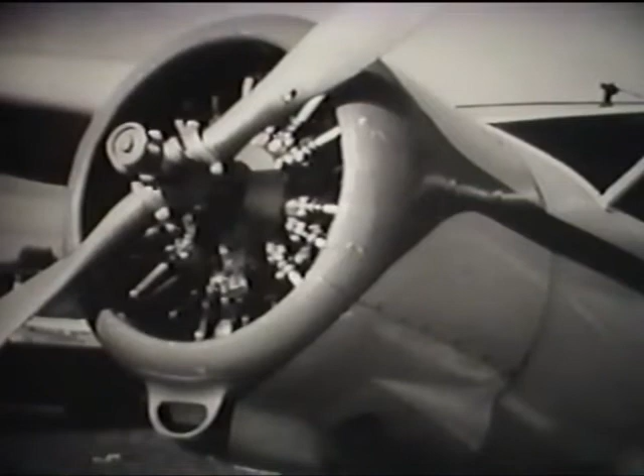In time, the answer came with the invention of the internal combustion engine. So man had finally found the power to conquer his new world of flight. At last, he could fly. But little did these first pilots dream that air would someday become more than a pathway, that it actually would become yet another source of power, the very power that would make modern aviation itself possible.

Power. Power to operate modern instrumentation and other devices. Power produced by air that we today know as aviation pneumatic systems.

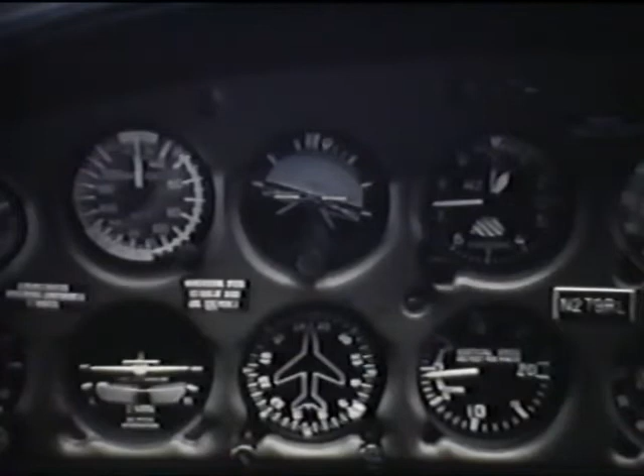The first time it's seen, pneumatics appears to be a strange sort of word, but basically all it refers to is a flow of air to produce vacuum, which is the pull or suction of air, or air pressure, that is the push of air. Simple really, but it is this air vacuum and pressure, pneumatics, which provide a constant and reliable source of energy to operate a number of instruments and other devices in aircraft.

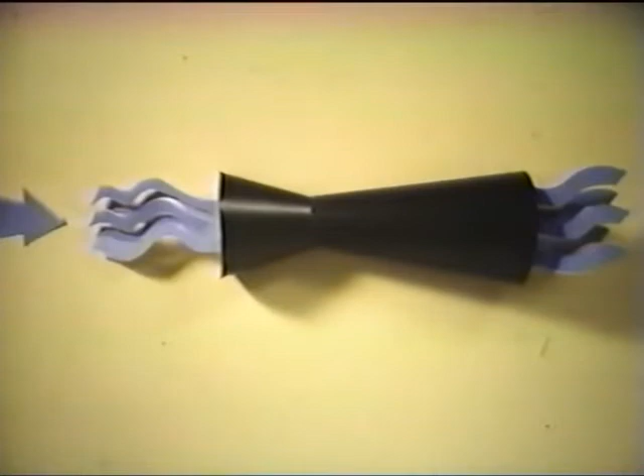These mechanical devices for accurately monitoring flight direction and relative position of aircraft to ground became essential, as did a source of energy to operate these instruments. Early aviation designers took their answer to this problem from the very air in which the pilots flew. Air, a constant source of energy, infinitely available and readily obtained. All you had to do was scoop it in, hence creating the airflow to operate the needed instruments. Early systems amounted to little more than this.

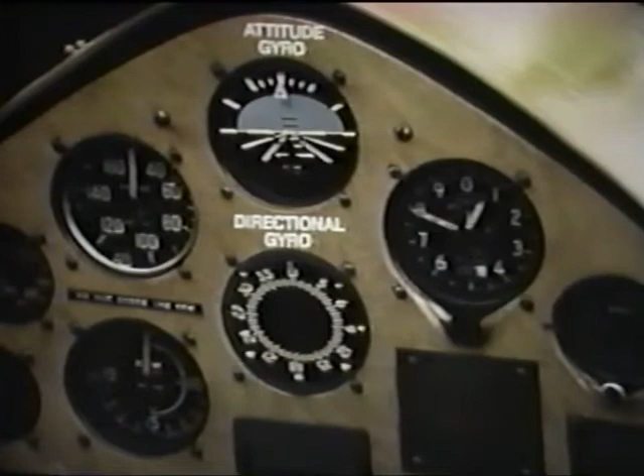They began with a venturi, a funnel-like device which was mounted on the fuselage directly in the propeller slipstream. The air passed directly through this venturi, thus creating a suction of air in the tubing connected to the instrument panel. This suction of air, or vacuum, operated gyro instruments which measured aircraft attitude and direction. The attitude gyro instrument showed the plane's position relative to the ground. The directional gyro instrument showed the pilot his direction of flight.

The basic principle was quite simple. The moving air spun a gyro inside the instrument. The spinning gyro, in turn, produced an instrument reference. Here we see this suction illustrated. As air passes continuously through the venturi, it creates a suction of air in the tubing from the gyro instruments. Air entering the gyros, because of this suction, is first filtered to protect the instruments. The gauge simply measures and indicates to the pilot the amount of suction in this system.

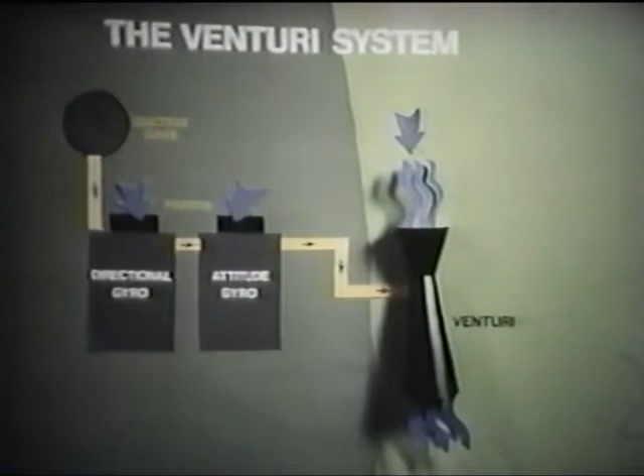The basic principle remains unchanged to this day. In fact, up through World War II, the simple airflow system, obviously refined, was the basic technique for pneumatics. However, a major problem with the early venturi system was the fact that ice could form at altitude, clogging the venturi. This restriction in airflow caused instruments to inadequately function. So a new and better system had to be invented to permit flying in adverse conditions.

Some mechanical means was required to produce the necessary airflow. Thus was the wet air pump and system introduced to aviation pneumatics. Mounted on the aircraft engine and powered by it, the air pump provided dependable airflow in any weather. Further advances logically centered on air pumps, which became the principal component of any pneumatic system. The first air pumps used engine oil for cooling and lubricating. Therefore, this was referred to as a wet system.

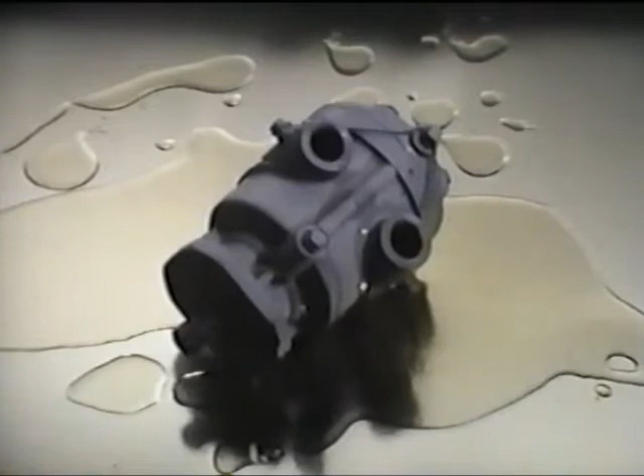Like the venturi system, the wet air pump system operated on the basis of air vacuum. However, unlike the exposed venturi, the airflow, now created by a pump, was totally contained within the aircraft. Cabin air was pulled through the instruments with a regulating valve controlling the proper amount of vacuum.

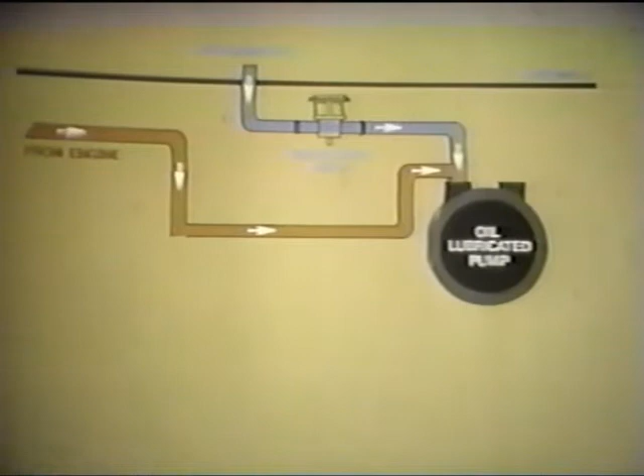Cooling and lubrication for the pump were provided by engine oil, which was drawn through the pump at the same time as the air. A mixture of oil and air was forced out of the pump, where it was diverted to an oil separator. Most of the oil went back to the engine, and the somewhat oily air went overboard. A bit cumbersome and somewhat messy, to be sure. But the wet pump still was a big step in the right direction for aviation, and many wet air systems are still in use today.

Not only did the arrival of air pumps eliminate the problem of venturi icing, it also provided enough extra airflow to conquer yet another icing problem. When flying during inclement weather, such as rain, sleet, or snow, ice would build up on the leading edges of the wings and tail, creating dangerously excessive weight.

It also disturbed the aerodynamic flow, thus reducing control, or at the worst, even causing loss of control. To solve this problem, inflatable rubber boots were developed which could be attached to those surfaces vulnerable to icing. These boots drew the air for their operation from the ample flow created by the air pump.

While inactive, the boots are deflated. When ice forms, the boots are inflated, thus cracking off the ice. Once the ice is removed, the boots are again deflated. Special valves operated by the pilot control this function. Designers soon saw more tasks to be performed by pneumatic systems. And all this was made possible by the wet air pump.

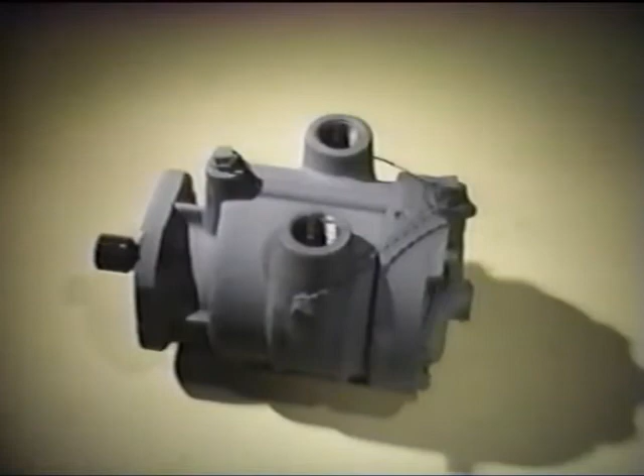However, along with these benefits, the wet system also presented numerous disadvantages. For example, the need for oil separators made the system complex and heavy. Oil used to lubricate the pump could in time work its way through the entire system and eventually contaminate the rubber boots and control valves. Additionally, the oily air dumped overboard streaked the fuselage or wings. Obviously, something still better was needed.

The answer was the dry system, pioneered by Airborne and introduced in 1957. Like the wet air pump, the dry air pump also is mounted on the aircraft engine and is powered by it. From here, the differences are significant, for introduction of the dry air pump amounted to a unique breakthrough in aviation pneumatics design.

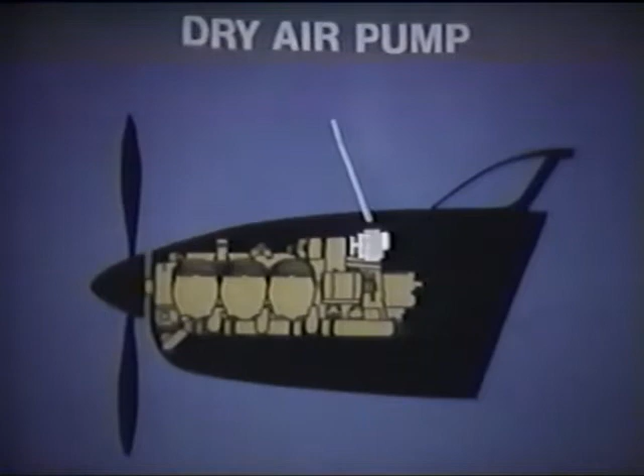This successful development of a self-lubricating dry air pump now eliminated the need for oil cooling and oil lubricating. The dry system thus offered all the advantages of the Venturi and wet systems, but overcame the major disadvantages of both. The simple, lightweight, and dependable dry air pump is the heart of today's dry pneumatic systems. Clean, dry air does all the work in this system, eliminating the need for heavy oil separators and excessive oil lines. There is no oil contamination of the de-ice system, and the dry air system is easy to maintain.

Yes, the dry air pneumatic system was a milestone advance for aviation. It opened the way for many more tasks to be performed by pneumatic power, tasks to meet important needs in aviation. Almost every year was bringing with it new demands for aircraft to fly higher, farther, faster. At the same time, pilots and their passengers were calling for greater safety, more comfort and convenience.

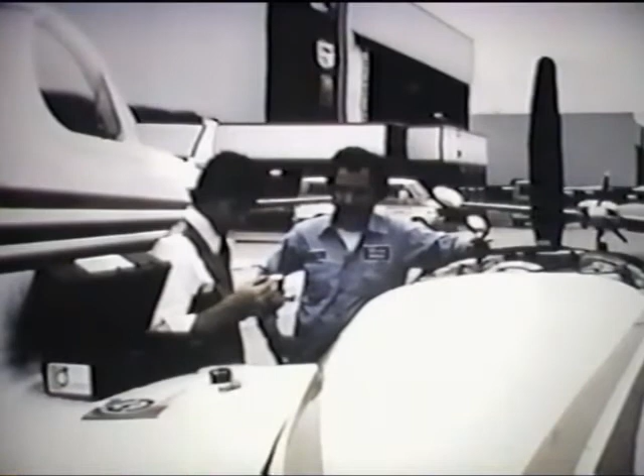And this led to increasing demands for performance from pneumatic systems, as well as adding to a growing list of tasks to be performed. For example, in addition to powering instruments and de-ice systems, pneumatic systems today must seal doors for pressurized aircraft. And they must energize autopilots. In addition, manufacturers, owners, and operators of aircraft were demanding longer life, greater reliability, and economy from their pneumatic systems.

These performance demands called for basic and significant improvements in aircraft pneumatic systems. The dry air pump provided the basis for greater efficiency. Further improvements were made throughout the dry air system itself, to the point where this system is now nearly universal in the general aviation industry. You'll now find dry air systems in aircraft of many different types and sizes, largely because the dry air pump can deliver reliable pneumatic power through both of the two basic ways, vacuum and pressure.

For a vacuum system, air lines are connected to the dry air pump's inlet port, which pulls air. For a pressure system, lines are connected to the outlet port, which pushes air. In a vacuum system, the air pump draws or pulls air from the aircraft cabin, drawing the air through the pneumatic system and those instruments attached to the system. In the pressure system, the air pump draws outside air through an inlet filter and then forces or pushes the air through the system and the attached instruments.

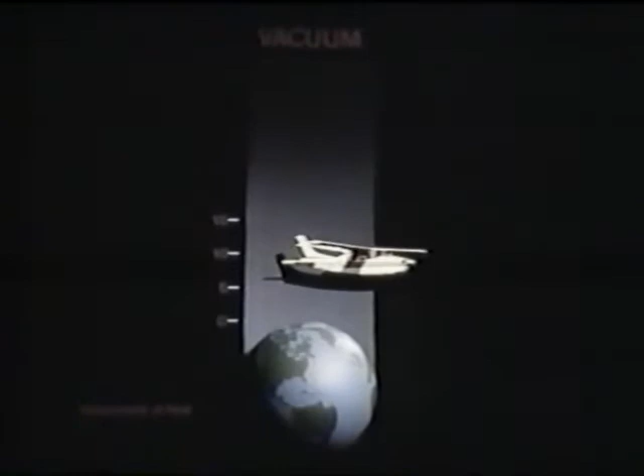While vacuum systems perform well in the applications for which they are intended, they may be less efficient for high-altitude, high-performance aircraft. Here's why. A pump in a vacuum system operates with higher air compression ratios. This produces more heat in the pump. The thin, dry air found at higher altitudes lacks natural cooling capacity to offset this heat. At lower altitudes, the heavier, more moist air found there has the natural cooling properties to counteract heat buildup. A pressure system operates with lower air compression ratios, thus creating less heat. This results in lower internal temperatures.

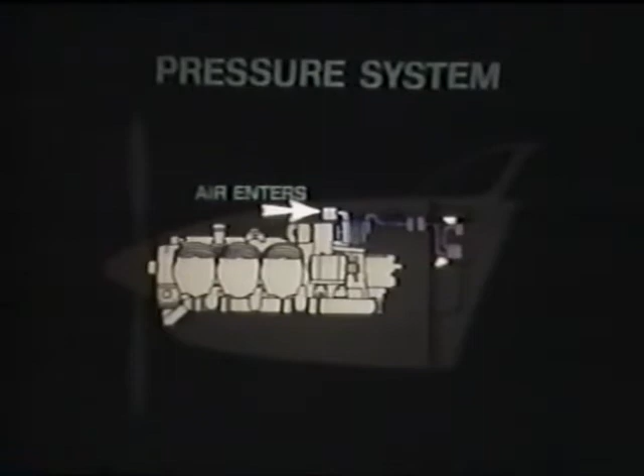Further, in a pressure system, air pressure is higher at the pump inlet, located at the beginning of the system. Therefore, cooler, denser air is moved through the pump. This greater density results in both a greater mass of air through the pump and a higher moisture content at the pump. Taken together, this denser, cooler, more moist air, by both cooling and lubricating internal parts of the pump, helps reduce pump wear and extend pump life.

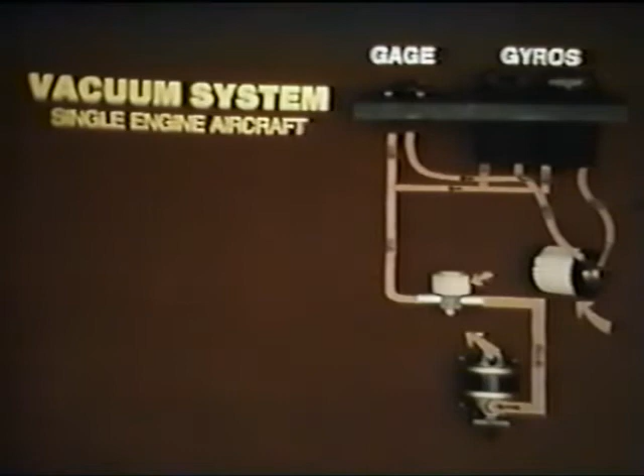Let's take a closer look at both the vacuum and pressure systems. First, the vacuum system. Here is a typical vacuum system in a single-engine aircraft. The engine-mounted air pump draws a constant flow of cabin air through the entire system. Air enters this system through a central air filter. This air is then drawn through the gyro instruments and gauge.

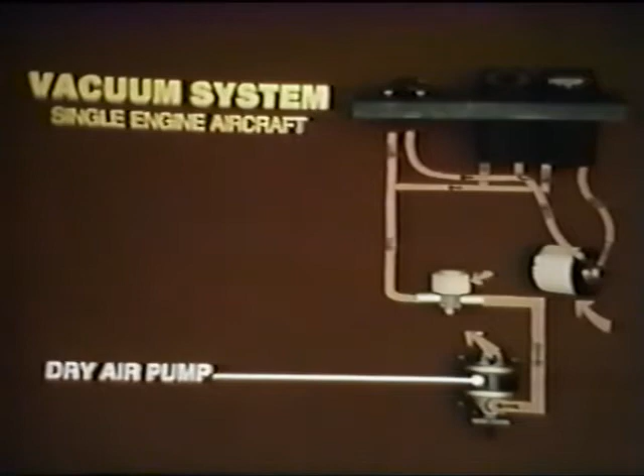Next, a preset vacuum regulating valve located between the instruments and the air pump assures that only the right amount of air is pulled through the instruments, thus protecting the delicate gyros and providing reliable instrument readings. The air pump is at the final point in the vacuum system because, as you'll recall, it is pulling air through the system. Once air is drawn through the air pump, it is dumped overboard.

In twin-engine aircraft, the vacuum system is basically the same. However, there are two pumps connected by a manifold with check valves drawing air through the entire system. This provides a backup energy source should one engine or pump fail.

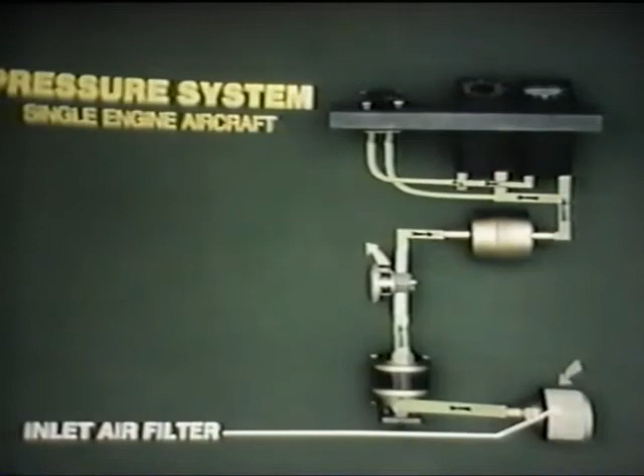Now let's take a closer look at the pressure system. Here is a typical pressure system in a single-engine aircraft. The air pump, also engine-mounted, pushes a continuous flow of air through the entire system. In such a system, necessary air is drawn in by the air pump through an inlet filter. The air pump is located at the front end of the pressure system because it is pushing air through the system. This pressurized air first passes through a pressure regulating valve, which maintains a preset pressure to properly operate and protect the instruments by releasing any excess air pressure.

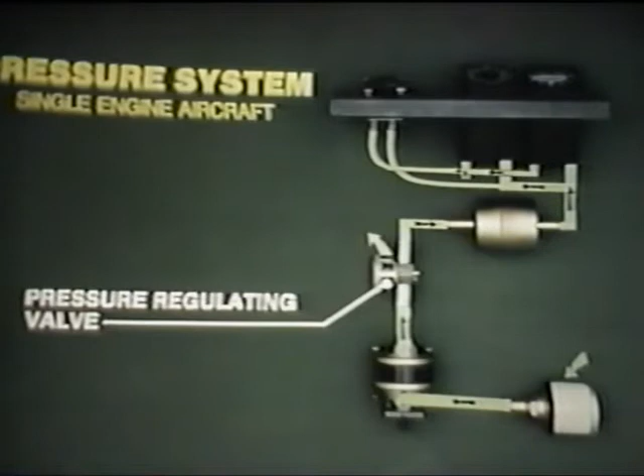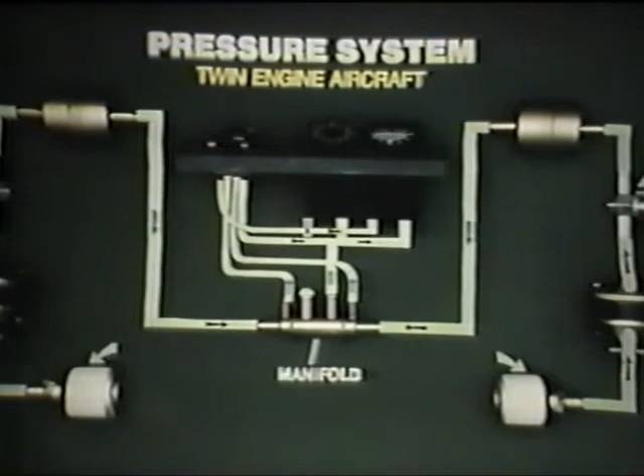The air at proper pressure then travels through an inline filter which protects the delicate gyros from any contaminants remaining in the system. Finally, the pressurized air is pushed through the gyro instruments and gauge, providing reliable instrumentation for the pilot. The pressure system is basically the same in twin-engine aircraft. Here, two pumps force the air through a manifold with check valves to direct pressure distribution to the airplane's instruments, and again ensure backup energy in case of engine or pump failure.

As we've seen in the preceding schematics, both the vacuum and pressure systems are made up of four basic components: dry air pump, regulating valves and gauges, fittings and tubing, and pneumatic filters. Let's examine each component separately. First, let's consider the dry air pump. This remarkable pump truly is the heart of an aircraft's pneumatic system. Like the human heart, the dry air pump is delicate, precise, and yet extremely durable. And also, like the human heart, its internal parts are structured to work in perfect unison with each other and with the circulatory system of which it is the main part.

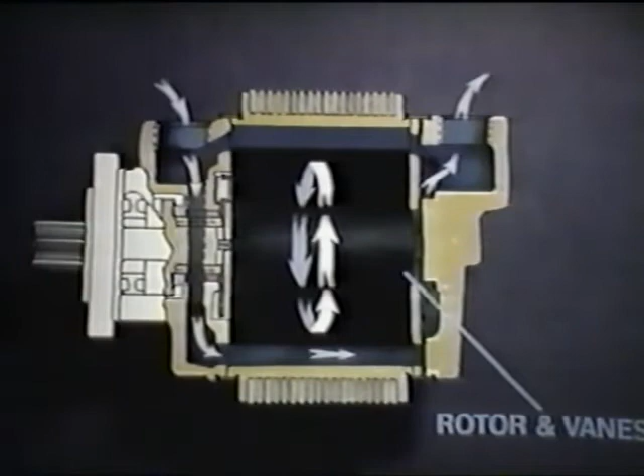This engine-mounted pump generates all the airflow, moving air with a rotor and vanes that roughly resemble a paddle wheel. It either pushes air to create air pressure or pulls air to create a vacuum through the entire pneumatic system. Maximum performance and pump life are achieved through a precision-engineered design, special lightweight materials, and careful construction. For example, the rotor and vanes on Airborne dry air pumps are made of a special carbon which is self-lubricating. As the vanes rotate with the rotor, vane tips wear at a precise rate, providing the pump's lubrication. This is why no oil is required. This is also why it's called the dry air pump.

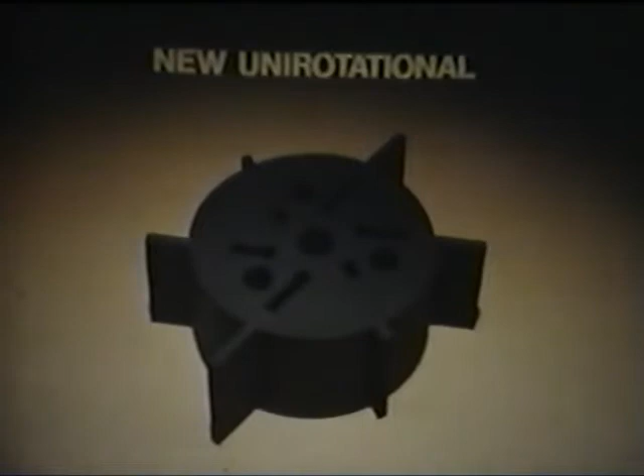Driven by the aircraft engine through a set of gears, the spinning rotor and vanes draw air through the front inlet port, creating vacuum there, and push it out the back outlet port, creating pressure. We compared it earlier to a paddle wheel. Unlike early air pumps, which had short vanes set straight into the rotor, such as shown here, the vanes on an Airborne pump are canted or set into the rotor at an angle. This allows for much longer vanes, with a corresponding increase in both efficiency and vane life.

However, because the vanes are canted, the rotor can turn in only one direction, clockwise or counterclockwise, depending on the engine's drive pad rotation and pump model. This actually is an advantage, and one of the reasons why Airborne engineered this approach. The unirotational design can increase pump life significantly over that of birotational pumps.

Airborne dry air pumps also have a unique patented torsional coupling. Made of flexible urethane, this coupling helps absorb engine vibration, thus increasing pump life. It also protects the engine from damage in the remote possibility of pump seizure by shearing and allowing the drive spline to rotate freely.

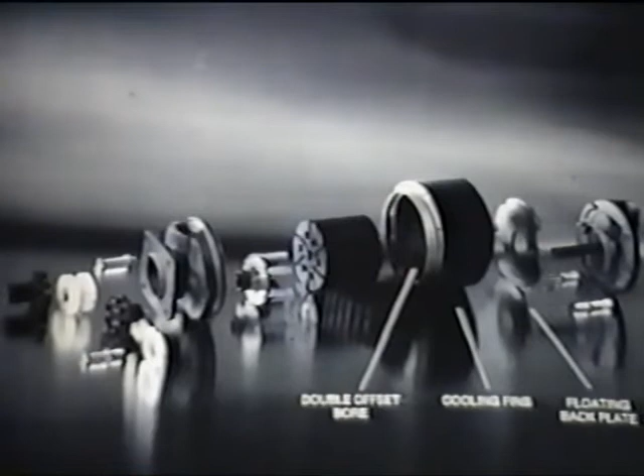In addition, Airborne dry air pumps have these features: a double offset bore that helps balance internal loads and bearing wear, cooling fins on high-pressure pumps to dispel heat, increasing pump life, and a floating backplate which allows for heat expansion, maintaining pump efficiency and life.

A final benefit is the fact that Airborne's dry air pump design features have allowed the development of efficient and long-life pumps for virtually all capacity requirements of today's general aviation aircraft. Next, let's consider another important part of any pneumatic system: the valves and gauges.

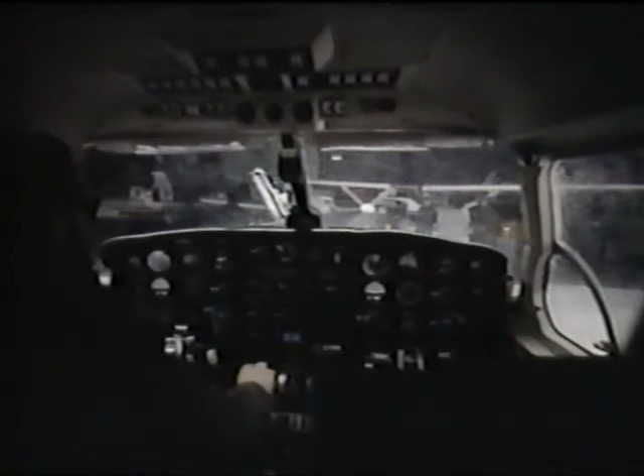In order for an aircraft's instrumentation to function accurately, exact vacuum or air pressure must be maintained within the system at all times. Compensation must be made for power surges, engine speed changes, de-ice boot inflation, and the like. This is a job for the pneumatic regulating valve, a precision component which is carefully preset at the factory to match its specific function in the system. There are regulating valves for both vacuum and pressure systems.

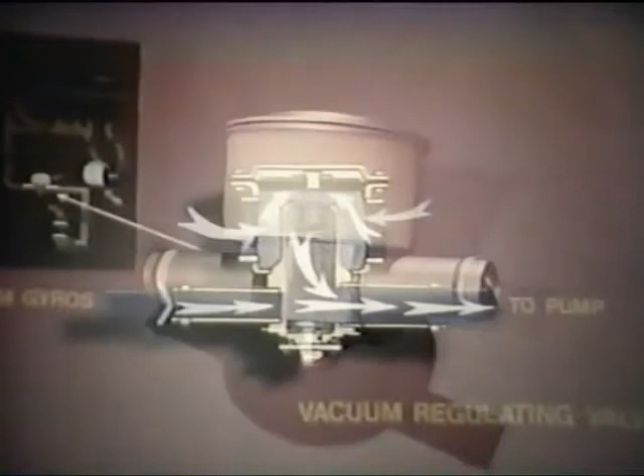A vacuum regulating valve is the main valve in a vacuum system. This valve protects the delicate gyro instruments by preventing any excess suction of air through the instruments. Here's how. Because the air pump draws more air than is required to operate the instruments, this preset valve opens a second stream of air to the pump, thus maintaining the proper vacuum level of air being drawn through the gyro instruments.

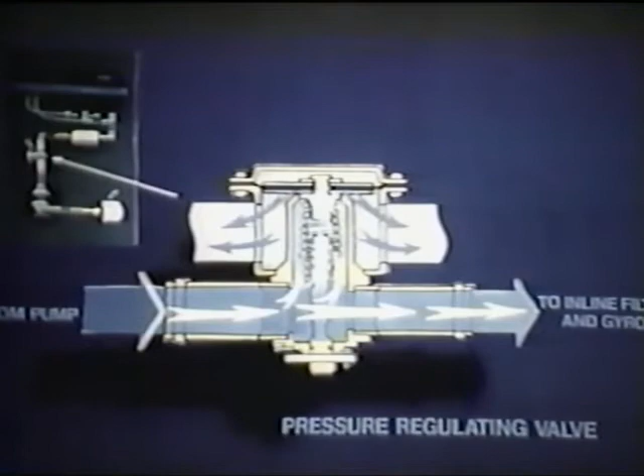In a pressure system, a pressure regulating valve is used. Since the air pump can push more air into the system than is required, the valve provides pressure relief when needed by opening and thus allowing some air to escape. This reduces any excess pressure into the gyro instruments.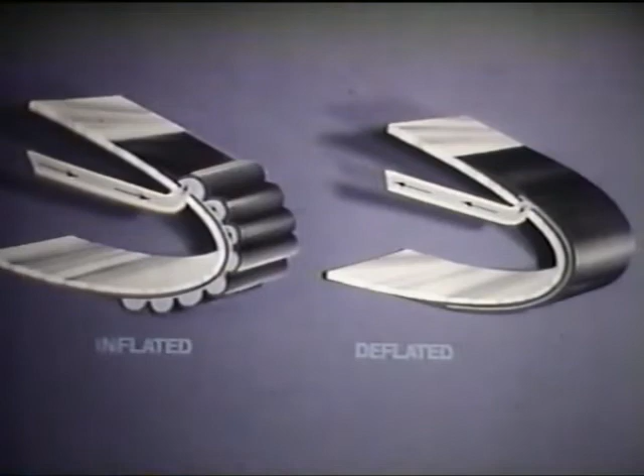Similarly, other valves work in conjunction with various pneumatically powered devices, such as de-ice boots. These valves can be activated by the pilot and used to direct air into the boots, thus inflating the boots and breaking off ice which has formed on the wings or tail, and to remove air from the boots, thus deflating them once ice has been removed.

Meanwhile, as these valves are activated in either mode, the pneumatic system remains in balance, the airflow continuing uninterrupted as it performs its other tasks. You'll find special purpose valves such as these in both vacuum and pressure systems, each valve designed to operate under the airflow designed into the particular system.

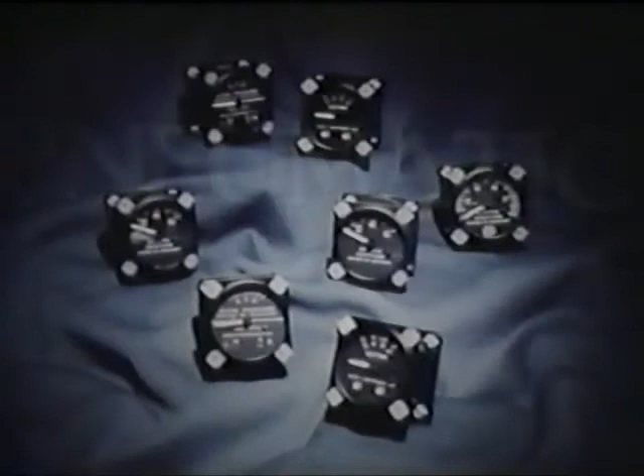The pilot also has a way of checking on his pneumatic system. He does this through pneumatic gauges on the instrument panel. Just like the valves, two types are basic: vacuum gauge and pressure gauge. Both advise the pilot whether his pneumatic system is maintaining necessary vacuum or pressure.

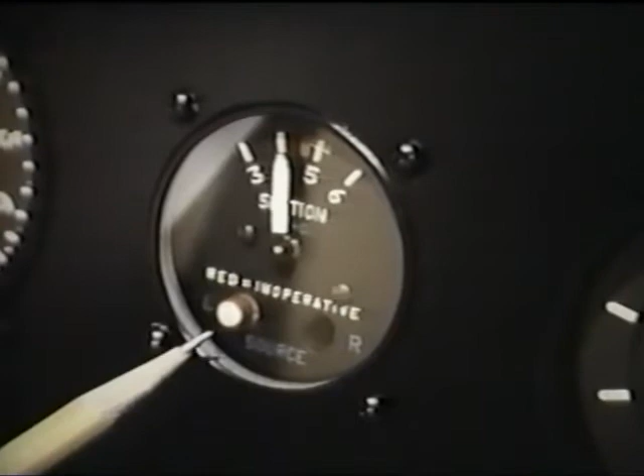If for some reason vacuum is interrupted, the ball will pop out, indicating that one side of the system is inoperative. In other words, this immediately warns the pilot that half of the airflow has been lost. Meanwhile, proper gyro operation is maintained with the one pump that is functioning properly.

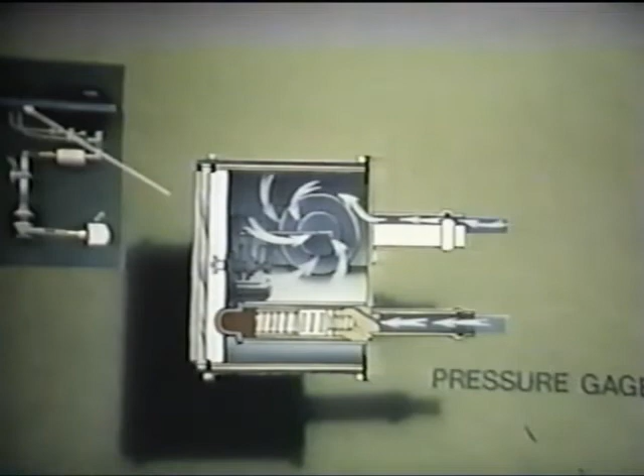In the pressure gauge, air pressure compresses a bellows, which moves the needle to give the pilot a reading on his system's air pressure. In a twin-engine application, in addition to giving a pressure reading by compressing the bellows shown at the top, this same air pressure forces the red ball at the bottom into its recessed position. If air pressure is lost, the red ball pops out to warn the pilot of a malfunction.

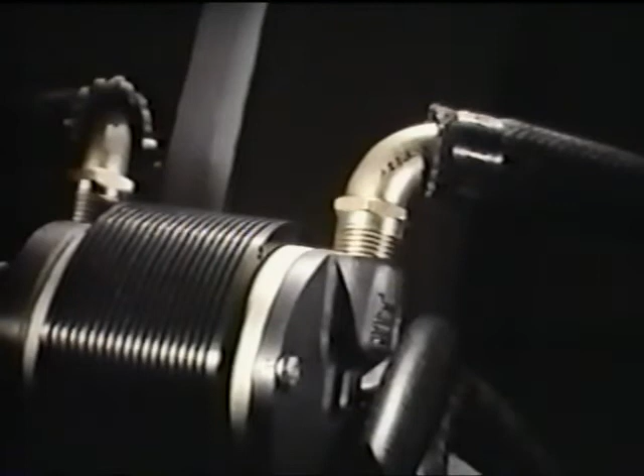Next, let's consider some components which are immediately related to the valves and gauges. These are the fittings and tubing through which the air in a pneumatic system flows. Although they are the simplest components in a pneumatic system, the fittings and tubing are just as vital as the rest. Continuing our comparison to the human heart and circulatory system, the tubes and fittings can be thought of as the veins and arteries. Just as the human circulatory system will fail if there is a blockage, so must the pneumatic system have an unrestricted flow in order to maintain the health of the system.

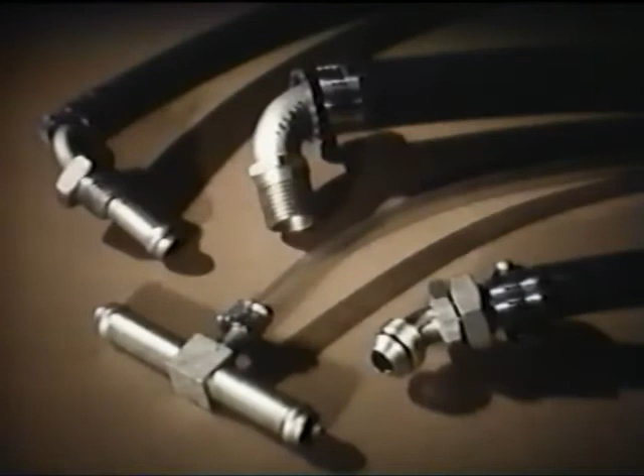Therefore, the pneumatic fittings and tubes, and in particular the fittings, must be carefully tailored to their tasks, providing proper airflow for instruments and other devices. Airborne low-loss fittings, with their wide-open passages, smooth-swept bends, and minimal restrictions, help prevent any loss in the vital flow of air. The freer airflow possible in this modern design becomes even more apparent when it is compared with the older design AN fitting.

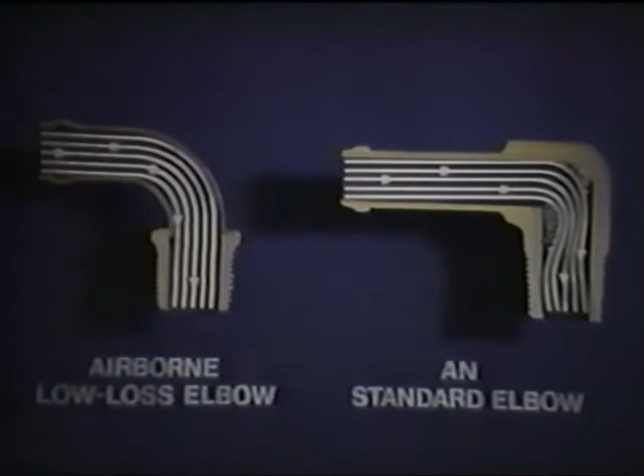AN fittings have sharp 90-degree bends that create areas of turbulence and restriction. On the other hand, Airborne low-loss fittings allow for a much freer flow at any flow rate. However, these advantages mean little if air hoses are not in proper condition or are not of the proper dimensions. Once correct hoses are installed, they should be checked periodically to detect crimps, cracks, frays, or other potential sources of failures.

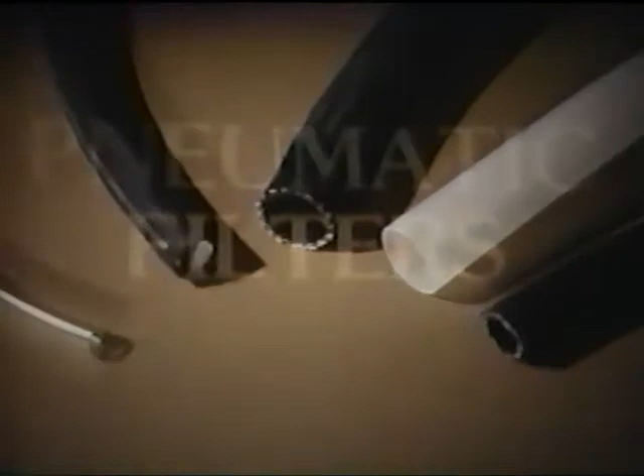Now let's move on to another extremely important part of the system: pneumatic filters. It's easy to overlook the fact that the air in a pneumatic system must be clean air. But clean air is essential, and therefore quality air filters, regularly replaced, are also essential. Clean air is needed not only to assure an adequate and unrestricted airflow. The air in a pneumatic system must also be kept clean in order to protect the delicate instruments and the dry air pump itself.

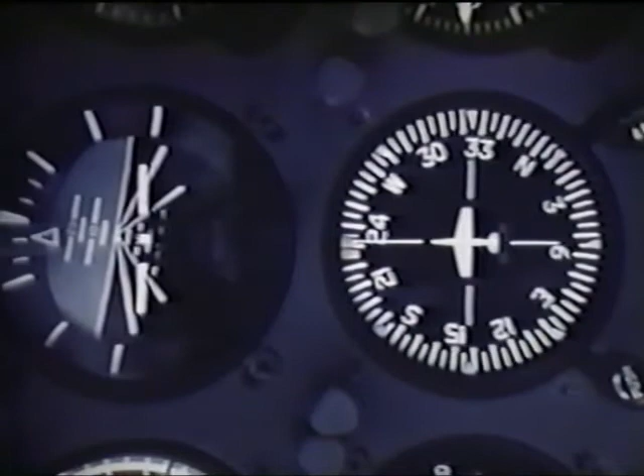To make sure that all of the pneumatic system is kept free of dust, dirt, smoke, and other contamination, several types of filters have been developed by Airborne to provide this essential protection. Let's take a look at several basic types. The inlet vacuum filter is the primary filter for the vacuum system. As the system takes in cabin air, this filter cleanses the air of dust, tobacco smoke, and other contaminants which might endanger the gyro instruments and air pump. Air entering at the regulating valve in a vacuum system must be cleaned by a special foam garter filter, which slips easily over the valves.

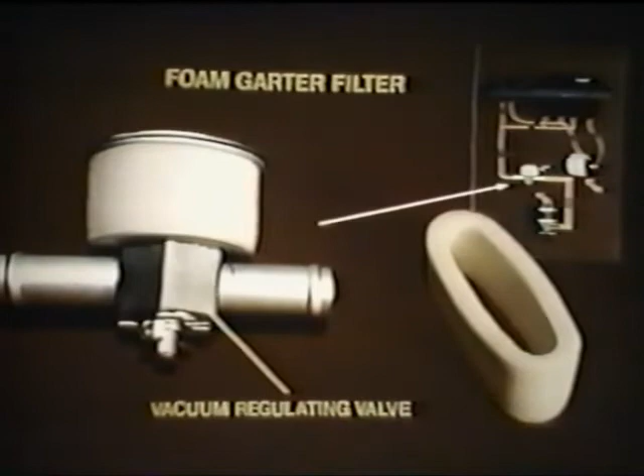Filtration in a pressure system obviously is equally important. Here it also begins with an inlet filter, which cleanses the incoming air prior to its entering the air pump. Inline pressure filters are specially mated to the unique characteristics of dry air pumps. Carbon particles may enter the pressure system from the pump as vanes wear down in the process of providing lubrication. So the air is passed through an inline pressure filter before it reaches the delicate flight instruments.

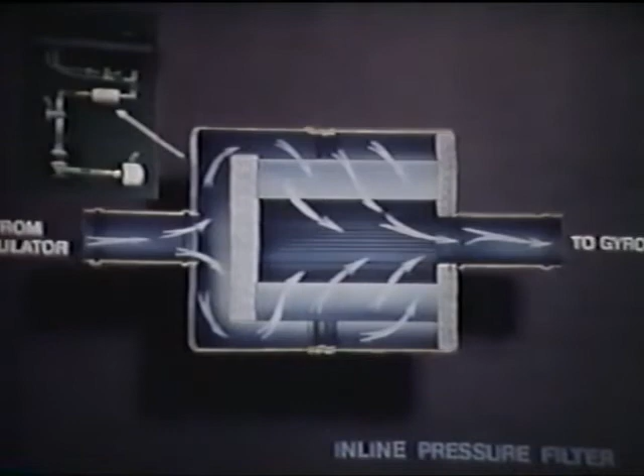This brings us to a final important point. Although they are precision items in themselves, pumps, valves, gauges, fittings, and filters work only as parts of a total system. Pneumatics is more than a collection of parts. It is a complete, integrated system and a vital part of the aircraft itself. A total system. With this important point in mind, pneumatic equipment and components are being designed and applied today with a systems approach. Every part of a pneumatic system should function as balanced portions of a total unit. So every part is designed, manufactured, and mated to function in total harmony.

Remember, however, that no matter how advanced designs may become, the efficiency and reliability of any pneumatic system will always be dependent upon regular maintenance and proper mechanical service. And these vital subjects are covered in Part 2 of this film on modern aviation pneumatics. An idea that flies.

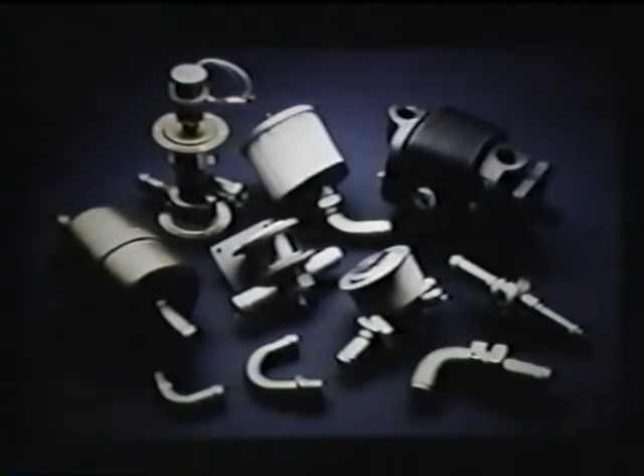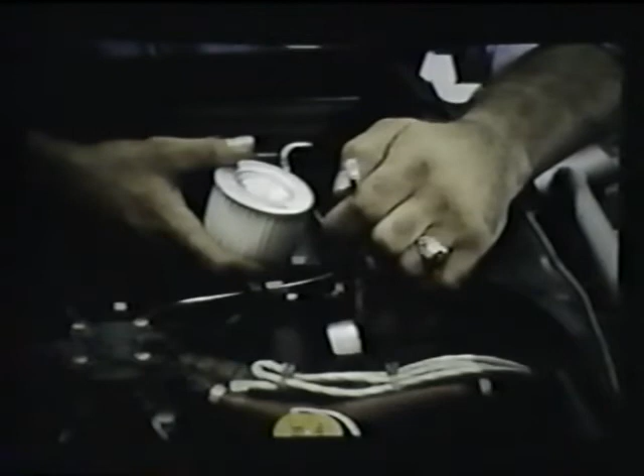Through a constant flow of information and training, our professionals are provided with the necessary experience to deal with pneumatic system field problems. Through the capture of ambient air, we direct its flow for a clean, reliable, and efficient source to operate gyros, inflate door seals, de-ice systems, and operate autopilot systems.

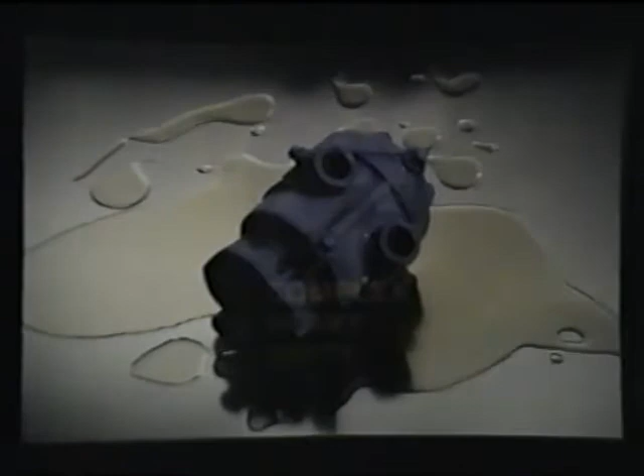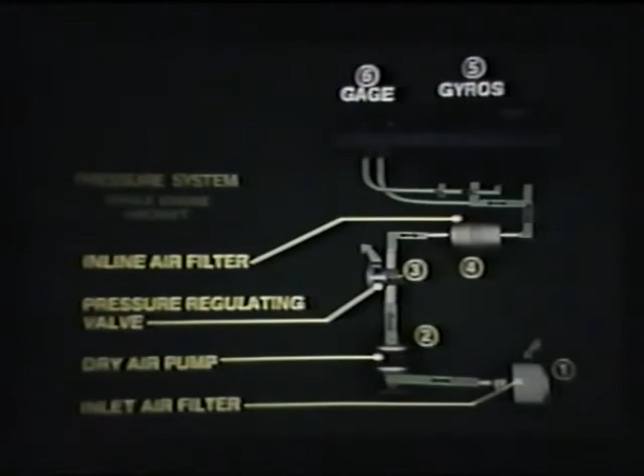Initially, wet pumps were a practical solution, but only for vacuum systems. They were heavy, complex, and consumed excessive amounts of engine oil, not to mention the oil-streaked aircraft belly that resulted. With this, Airborne developed the dry air pump, at work today in virtually every piston-driven aircraft. Our dry air pumps are clean, lightweight, and self-lubricating, eliminating from aircraft the usual oil and dirt contamination inherent in wet pump systems. Our pumps drive the pneumatic system, but every part in the system makes a vital contribution in how long a dry air pump will perform.

A well-maintained pneumatic system provides a clean, reliable source of air. Without proper maintenance, the pump becomes the victim of pneumatic system contamination or damage. It's a case of small problems causing major breakdowns. Fortunately, it's easy to identify probable sources of these problems, and it's all in knowing where to look.

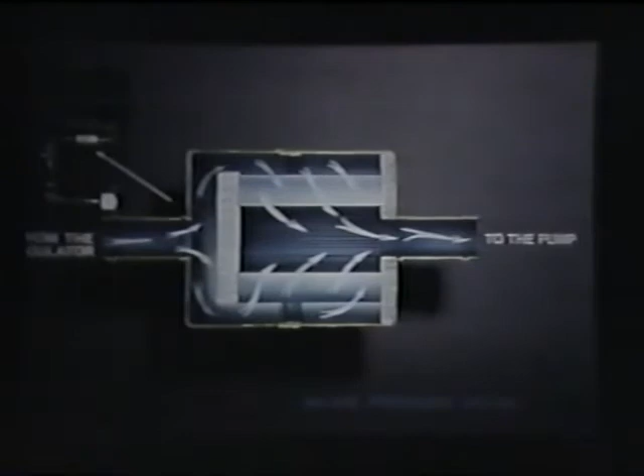Consider filters, for instance, the elements that screen impurities from the systems. The central air filter in a vacuum system and the pressure system inline filter safeguard delicate gyro instruments. The vacuum regulator filter and pressure system inlet filter offer similar protection for the dry air pump and its carbon rotor and vanes, which are built to very close tolerances for maximum efficiency.

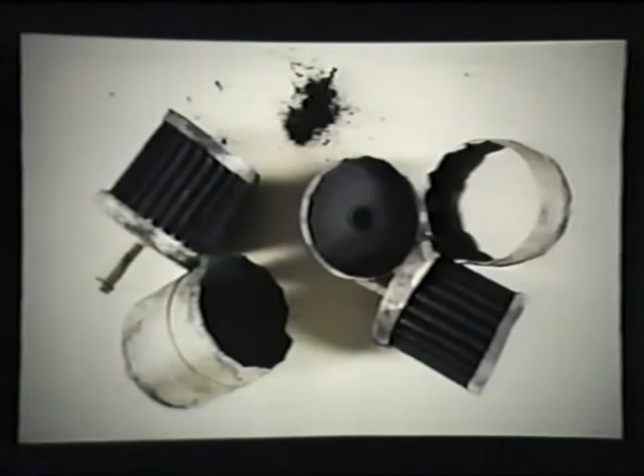Filters are designed to capture impurities. The more they screen, however, the lower the volume of air that passes through them. As the flow of air becomes restricted, the pump works harder and becomes hotter. This causes increased wear, resulting in a shorter service life. The reduction in the flow of air, as seen in the panel-mounted vacuum or pressure gauges, can be an indication of system restrictions, including clogged filters.

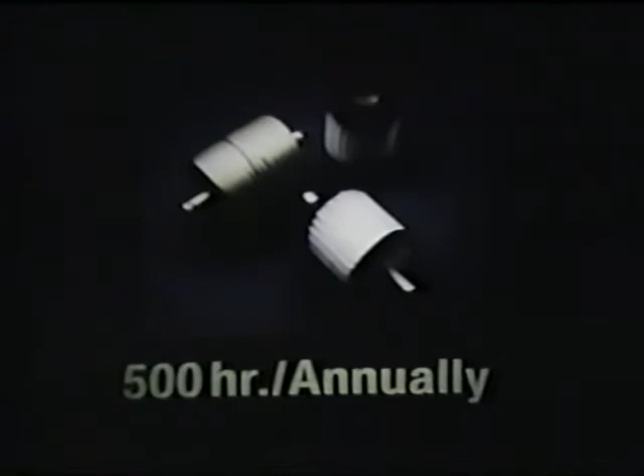Vacuum regulator filters and pressure system inlet filters require replacement every 100 hours or annually, whichever comes first. For central air and inline filters, it's every 500 hours or annually, whichever comes first. During new pump installation, the system should receive all new filters to give the pump a clean, free-flowing system to operate properly.

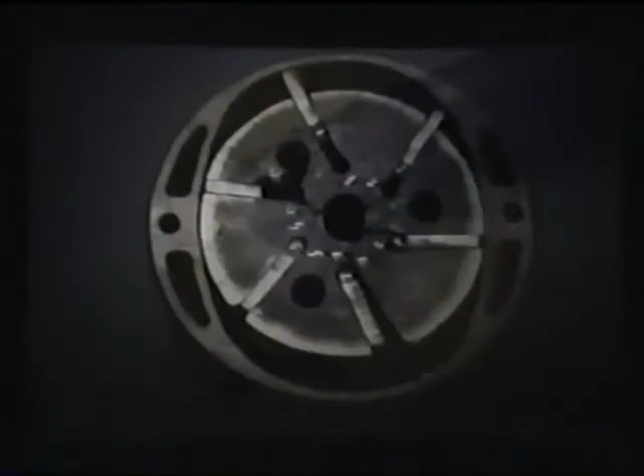However, filters are only one source of potential trouble for dry air pumps. When hoses are allowed to deteriorate, they become hard, cracked, or brittle. A small piece of hose in this condition can cause big consequences. Broken away from the inner lining, it is ingested into the system, where it can clog or rip filters, lodge in control valves, or even make its way to the pump, where it can't be discharged, jamming the vanes or rotor, causing the pump to fail.

Collapsed, kinked, or twisted hoses have the same effect as clogged filters. They restrict airflow and raise pump operating temperatures, virtually guaranteeing increased wear and shortening the pump life. Trouble may also occur when loose fittings create leaks in the system. At any point where airflow leaves the system, pressure or vacuum is lost. In a pressure system, for instance, an air leak will reduce airflow through the gyro. In the cabin, the differential gyro gauge indicates loss of pressure.

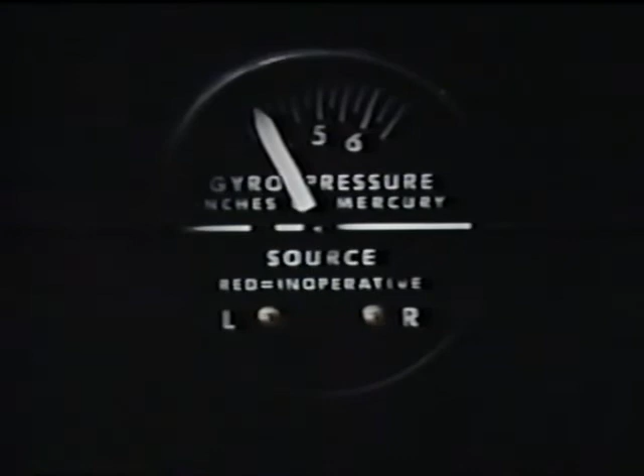An immediate remedy is to increase the setting on the regulator so that even with air loss, the pump forces more air through the filter to the gyros. The trouble is, the pump does all the compensating by creating more pressure than the system should need. It overheats, loses efficiency, and fails to reach its potential service life. It's easy to assume early pump failure means a bad pump in a well-maintained system. It's more likely that early pump failure is a symptom of a poorly maintained system. A high-quality hand-built pump performs only as well as the system is maintained.

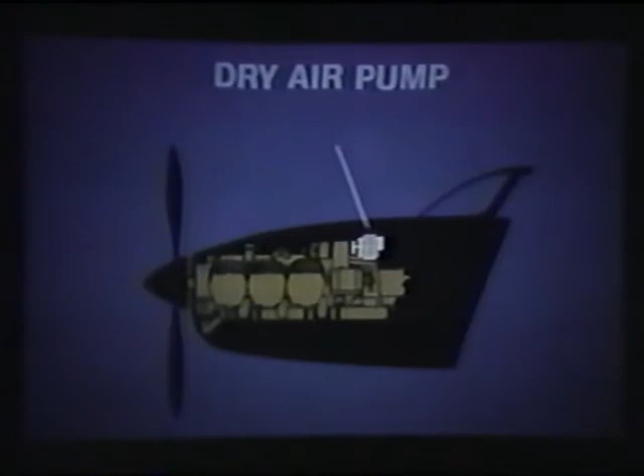Performance begins with system maintenance and the avoidance of contamination on the ground as well as in the air. As the engine compartment is cleaned during annual and 100-hour inspections, unprotected pneumatic system components are open to high-pressure cleaning solvents through filters, regulating valves, pump coupling areas, and vacuum system discharge hoses located in the engine compartment. Cleaning fluids can also enter the system through loose fittings or punctured hoses.

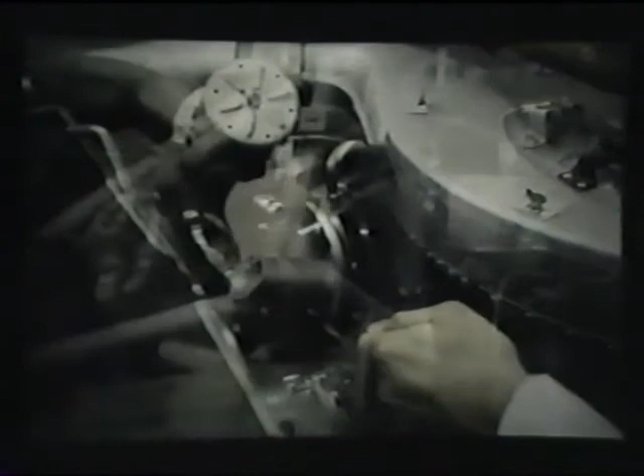Replacement of damaged hoses, proper tightening of fittings, and the protection of filters, valves, and coupling areas before engine cleaning prevents contamination that can contribute to pump failure when engines are started after cleaning. When solvent enters the pump, it can mix with the fine lubricating dust of the carbon vanes. This contamination restricts internal movement of the pump vanes and can shear the coupling.

A good pump will go bad just as quickly when the accessory drive pad seal leaks, allowing oil to enter the pump. Any evidence of oil around the pad or lower surface of the pump means a bad seal. That calls for replacement of the air pump drive pad seal immediately.

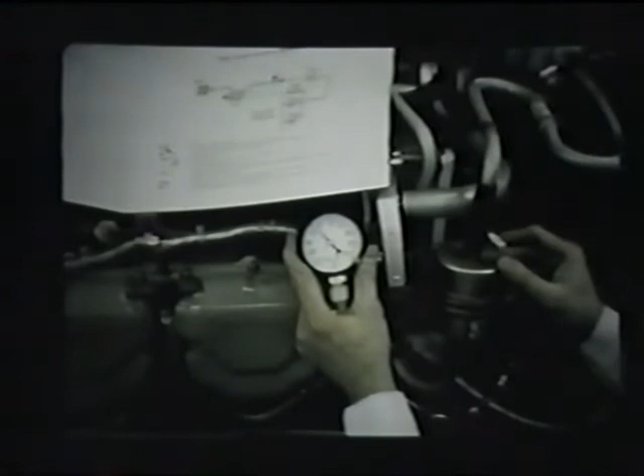Routine periodic maintenance is really nothing more than checking each pneumatic component for blockage, leaks, or damage. That includes fittings inspected for tightness and buildup of foreign matter, and unserviceable fittings that have stripped or burred threads or are twisted, bent, or truncated. These fittings are not airworthy and must be replaced.

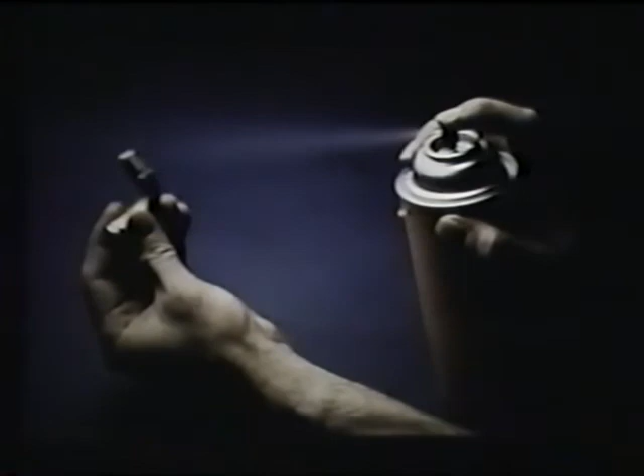Whether replacing worn fittings or reinstalling usable ones after cleaning, spray the threads with a silicone lubricant. Do not use Teflon tape or thread lube. After the silicone is dried, install the fittings hand tight. Avoid over-torquing. Tighten a maximum of 1.5 turns with a box wrench.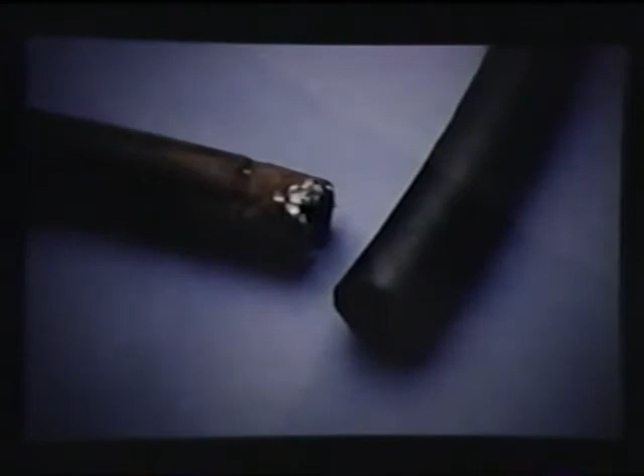Another way to avoid system trouble is to inspect hoses. Cracked, hard, brittle, oil-soaked, or punctured hoses are considered bad, and they can also cause reduced airflow by kinks, twists, bends, or points of collapse. These conditions mean contamination or reduced airflow and increased wear on the pump, clearly indicating that it's time for a new hose. Lastly, regulators and valves need to be checked for blockage and cleaned of contamination, then properly reset to regulate the correct pressure or vacuum throughout the well-maintained system.

System maintenance gets at the causes of early pump failure before they happen. Replace dirty filters, damaged fittings, hoses, and clean the inlet lines to the pump to eliminate carbon debris from the previous pump. Finally, check and clean all regulators and valves in the system. Only after all of these steps have been taken during a scheduled maintenance session can a pneumatic system perform properly.

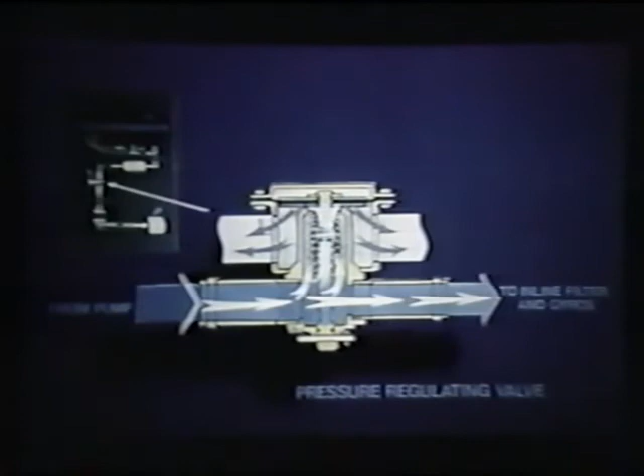Nevertheless, pumps have been known to fail even in the best maintained pneumatic system. Troubleshoot when a pump has failed soon after installation, when an aircraft has a history of short pump life, when gauges show pressure or vacuum to be above or below proper levels, or when the gyro performance is erratic and the DI system, door seals, or autopilot systems malfunction.

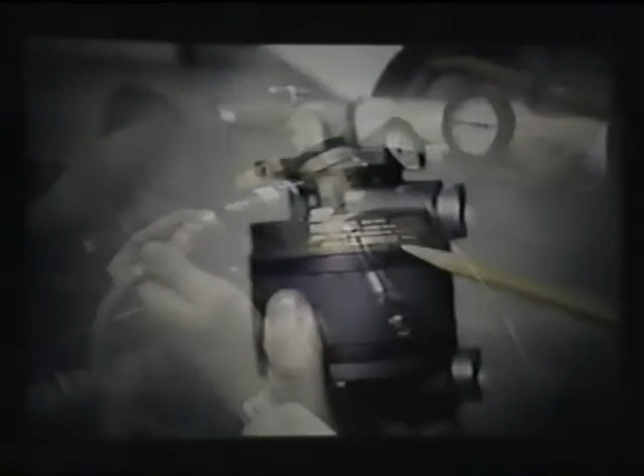The professional troubleshooter assumes that any pneumatic problem can affect the pump and performs every possible check, from making sure the pump is the right one for the aircraft engine to inspecting all components in operation to identify points of pressure or vacuum loss that may go undetected during routine maintenance.

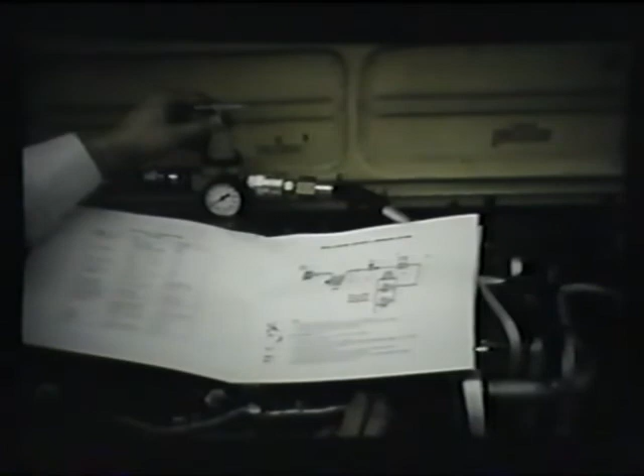The safest and most accurate way to run a system check is to use the Airborne 343 test kit. The kit is delivered with an instruction manual, which includes a complete troubleshooting guide and step-by-step instructions for checking and setting up a complete system. The 343 test kit provides greater speed, reliability, and safety, rather than makeshift methods or trying to adjust the system with the aircraft engines running.

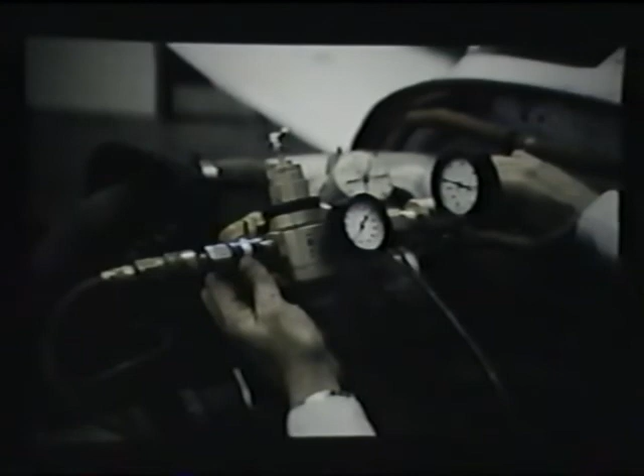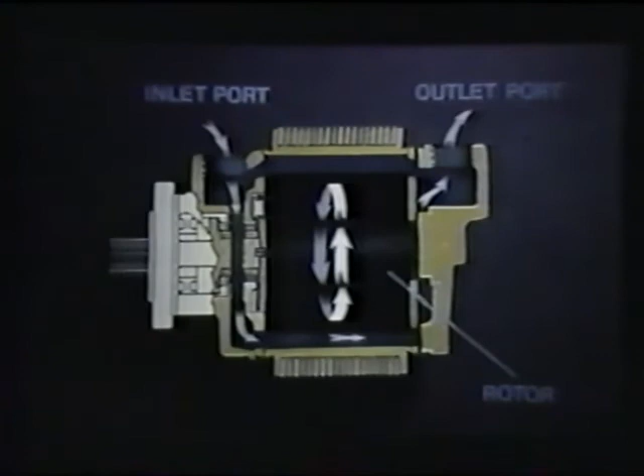The kit provides a means of adjusting vacuum and pressure systems for both single and twin-engine aircraft. This includes a handheld pressure vacuum gauge to probe the system at various points to verify accurate pressures. It takes a professional to ask the right questions and to adjust the chain of cause and effect that keeps a pneumatic system operating properly and working with the dry air pump, not against it. Even after excellent system maintenance and troubleshooting, dry air pumps have been known to fail.

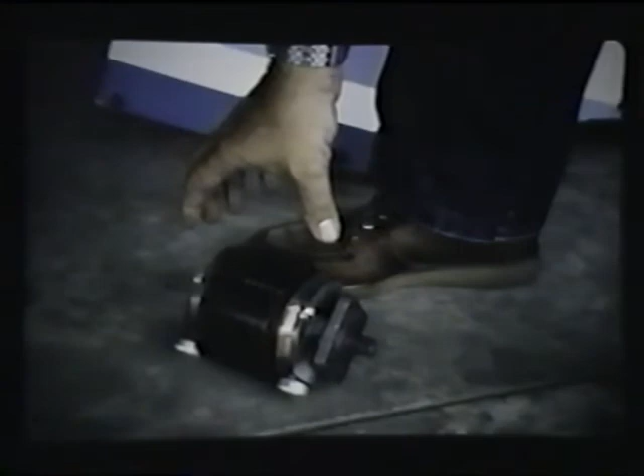Dropped pumps do fail. Whether or not external damage shows, dropping can cause internal damage, and a new pump can be destined for failure before the aircraft ever leaves the ground. Don't install a dropped pump. Clamping a pump in a vise around the center housing is another very common installation mistake, resulting in premature pump failure. Since only a light vise pressure is needed to crack the carbon rotor, the pump is safest in a vise with protective soft metal or wood jaws clamped around the pump mounting flange.

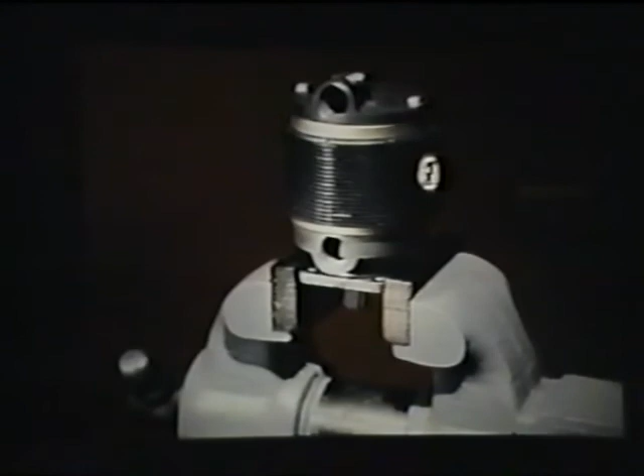Attention to details such as these go a long way toward making installation time pay off in long pump service life. For example, a careful check that the pump is correct for the aircraft engine includes matching the pump rotation shown on the pump box part number label with the direction of the drive pad rotation. This includes making sure that Airborne's application list and the aircraft manufacturer's parts catalog specify the same pump model for the aircraft.

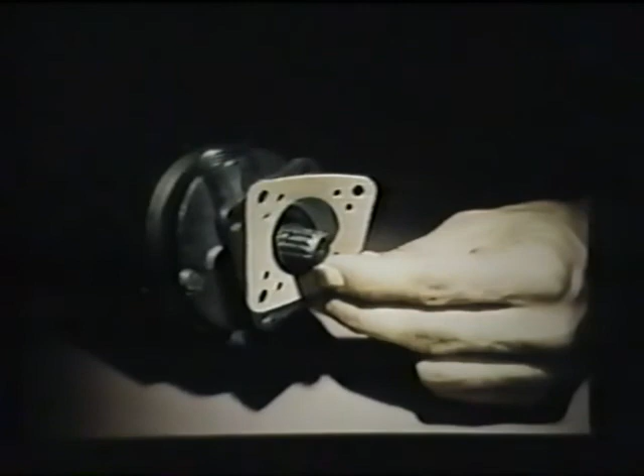Another often overlooked detail involves the old pad mounting gasket. It is very important to replace the old gasket with a new one, which is included in the pump box. The gasket provides for the accessory drive pad oil hole. It also creates a thermal barrier to protect the pump from engine heat.

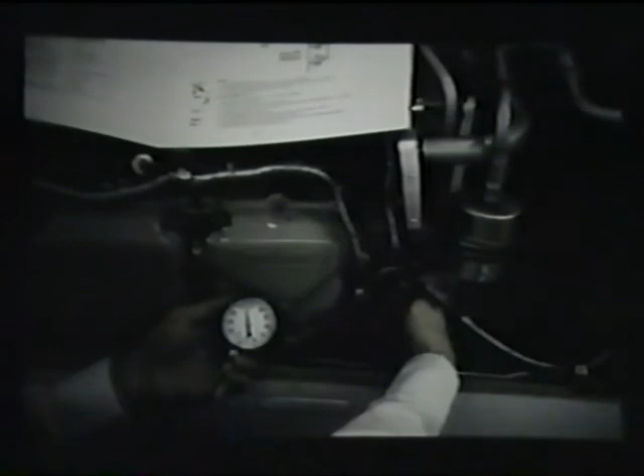Pneumatic system care is a cycle of prevention and correction aimed at protecting the dry air pump from system contamination and damage. Preventive maintenance keeps pneumatic components airworthy. Troubleshooting finds the causes of pump failure and corrects system trouble before a new pump is installed. And proper installation safeguards the long life designed into the pump. Quality is in the making of every Airborne dry air pump, but performance is in the hands of the professionals. Any dry air pump is only as trouble-free as the system it's in. The important difference is simply the people who maintain the system.

Pneumatics, the use of air, that most available and versatile of all natural resources, can be harnessed safely and reliably by having responsible professionals who maintain clean, unrestricted, properly adjusted pneumatic systems.